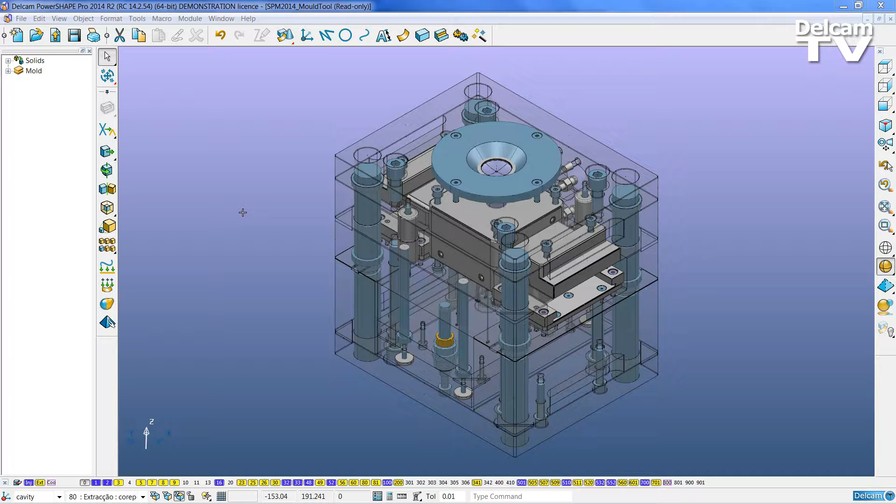Here we can see a complete mold tool assembly. By switching off the injection side, we can see two sliders, an insert and the lower half of the tool. So we can have a look at one of these inserts.

Just change the work plane here. We're looking top view. We're going to create 3 electrodes. The first electrode is going to be for the 2 tags shown here.

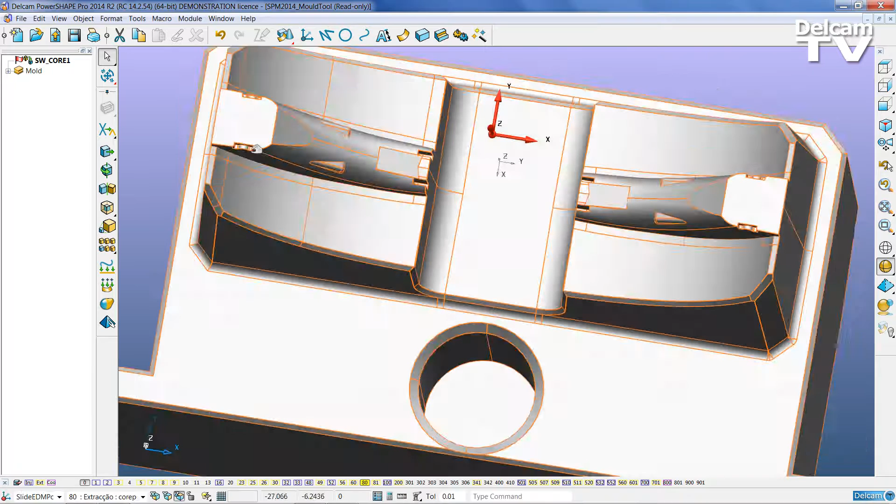So into my top view, just going to select that solid. We'll now have active this toolbar. Now, just going to do a lasso selection all the way around these top 2 regions here. Come into my solid core capture,

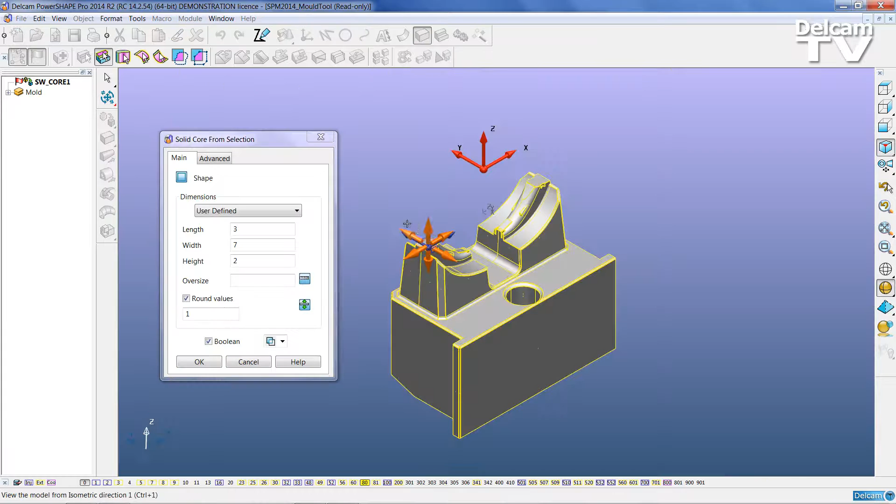and then apply the necessary oversizes to get the selection covering the whole area. Apply an oversize of 1 mm, and then change the direction here just to increase that to an overall height of 8 mm. Once that solid core is captured, I then need to apply some clearances.

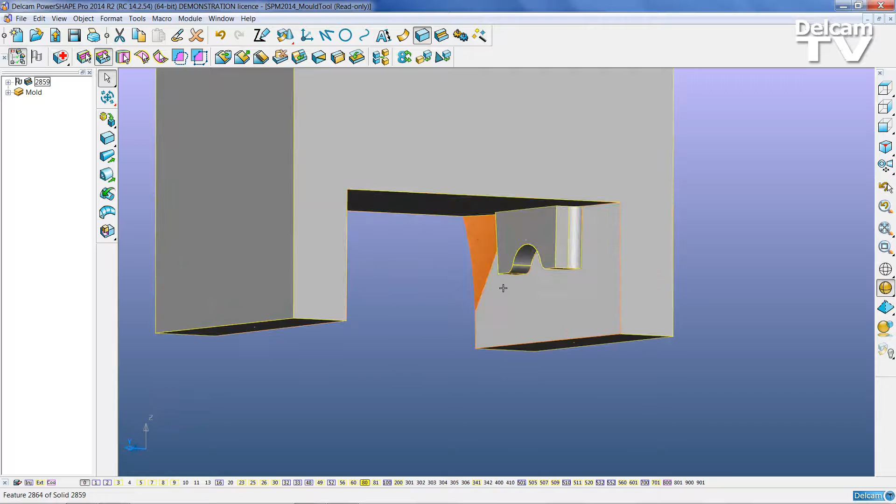So on the 2 inside faces, I'm going to select these first 2 here, and the opposite side, holding down my shift key, so I have all 4 selected. I'll come into my general edit tools and do an offset here of -1 mm.

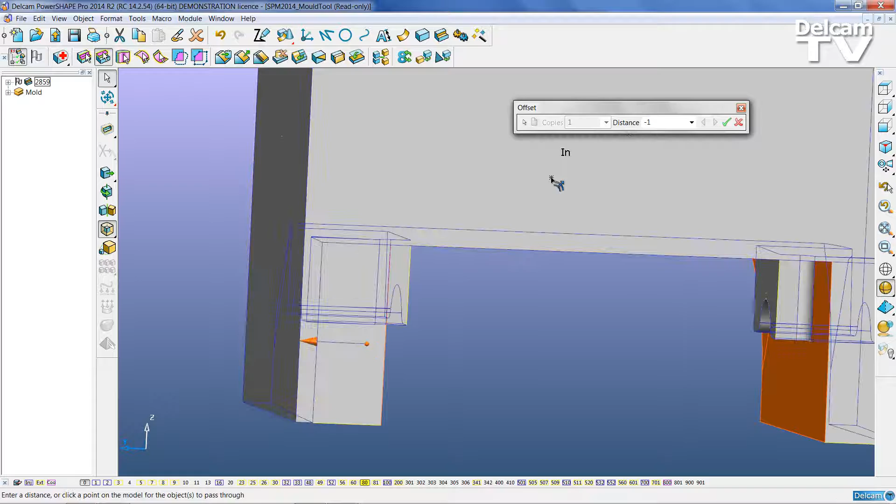I'll get the blue outline, give me an indication of where I'm to go. That is correct. I will accept that. We can see we have this radius here, area here naturally extended.

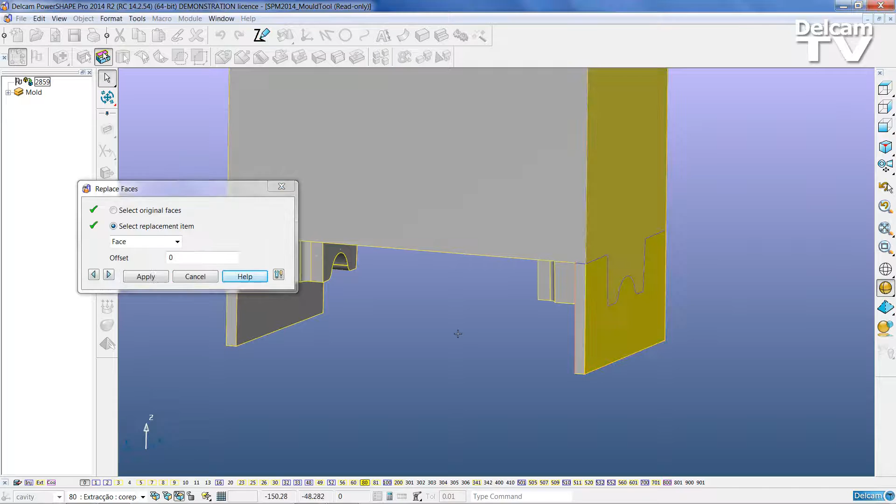What I would like to do now is just select these faces and remove them entirely. So I'm going to select the first 2 internal faces, do replace face to the outside, then using the right mouse button apply, have that removed.

Again on the opposite side, I can select the first 2 internal faces, select the external face, then using the right mouse button apply, also have those removed.

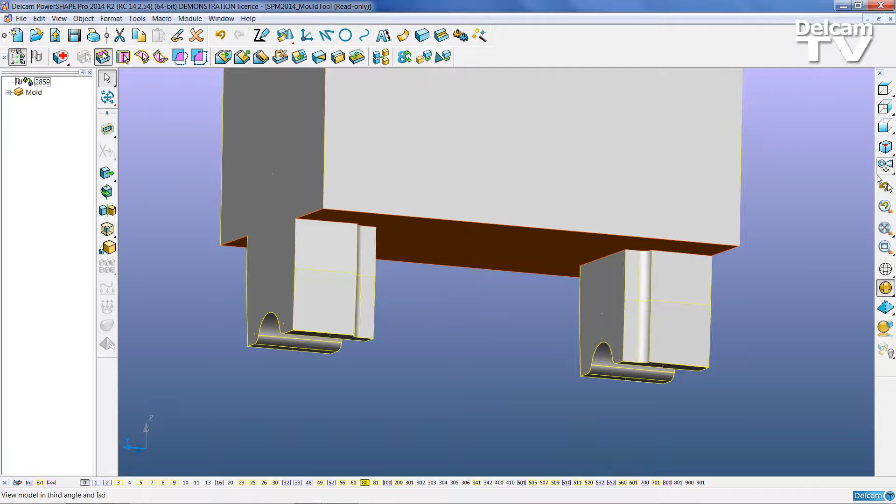All I need to do now is just apply some clearance to the top here. So I'm going to select that single face, then move that in Z 1 mm. I have now applied all the clearances necessary for this solid core capture, ready to turn it into an electrode.

So now make the insert active, ensure that's active, select the solid core capture, come into my electrode wizard. Does it include a base? No. This way the wizard will put it on for me.

Automatically selects the blank size that is appropriate to that solid core capture. I can rotate it round and see it here. Even at this early stage, I can do a simulation of the electrode.

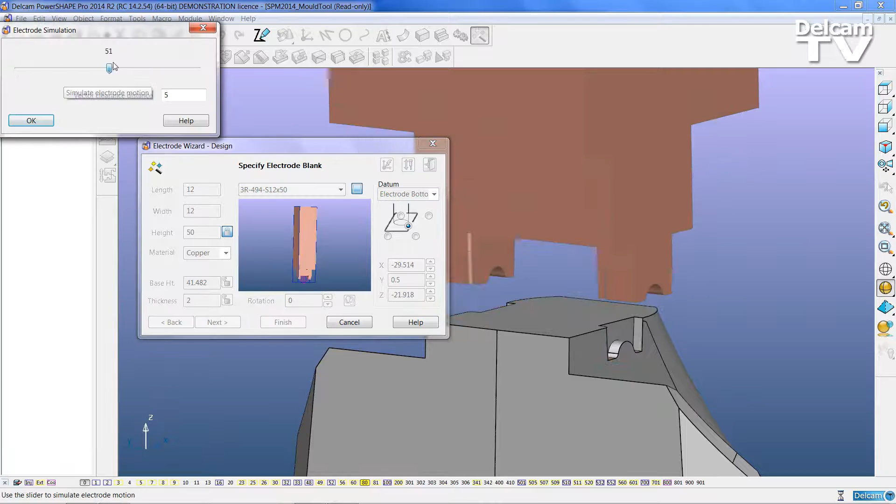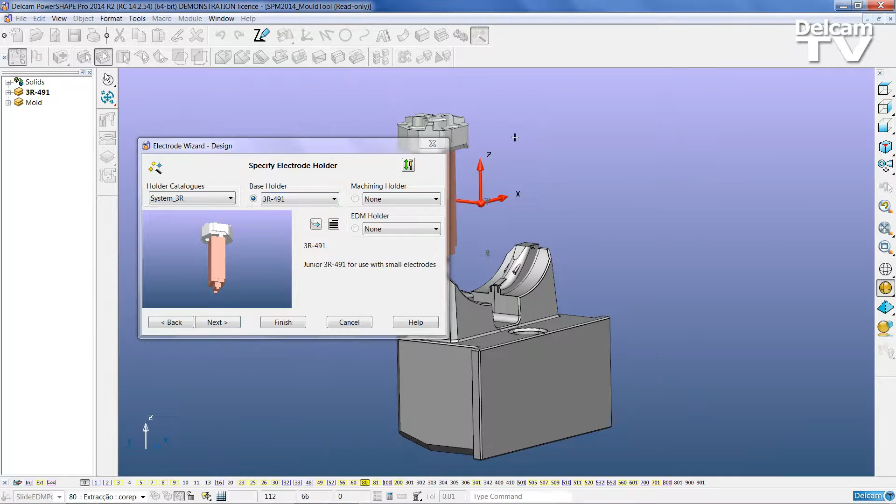Move to my next screen. We have 3 holder catalogues at standard: Erowa, Hirschmann and System 3R. This instance I'm going to use System 3R. Holder has been applied for me. If I zoom out now, we can see that holder been applied.

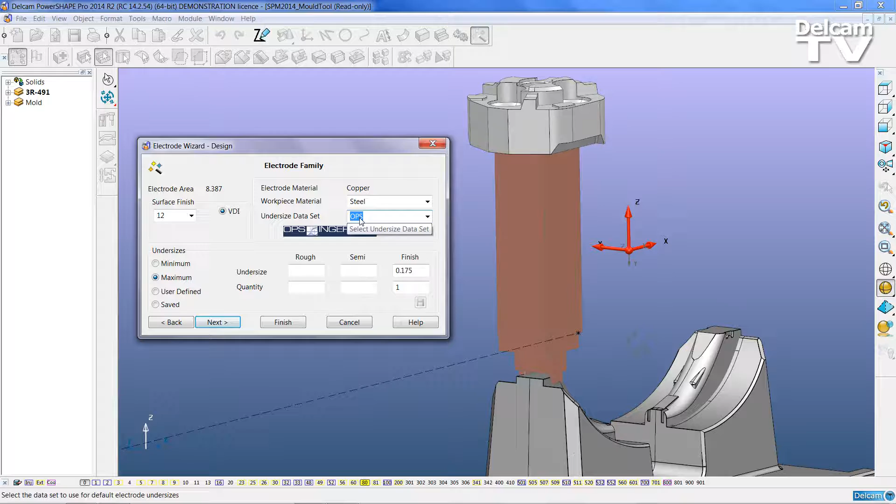I can go to my next screen. I can apply here spark gaps automatically using the undersized data sets of AGIE, OPS or Zimmer Kreim. This instance I'm going to use OPS. Go through to my final screen. I'll do no export and I'll finish creating my first electrode.

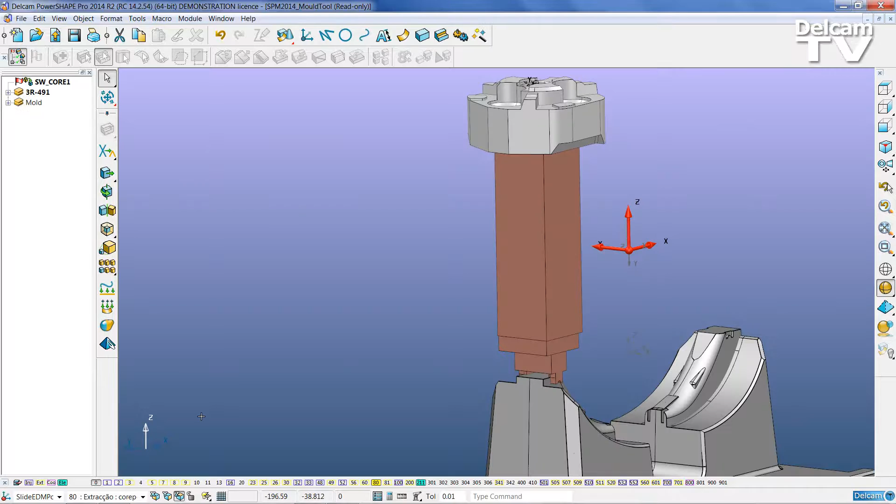So I'm going to turn off the electrode group, come back into the top view here. My second electrode is going to cover the whole main area. Now when we're doing a solid core capture, that works by using the extent of the faces selected.

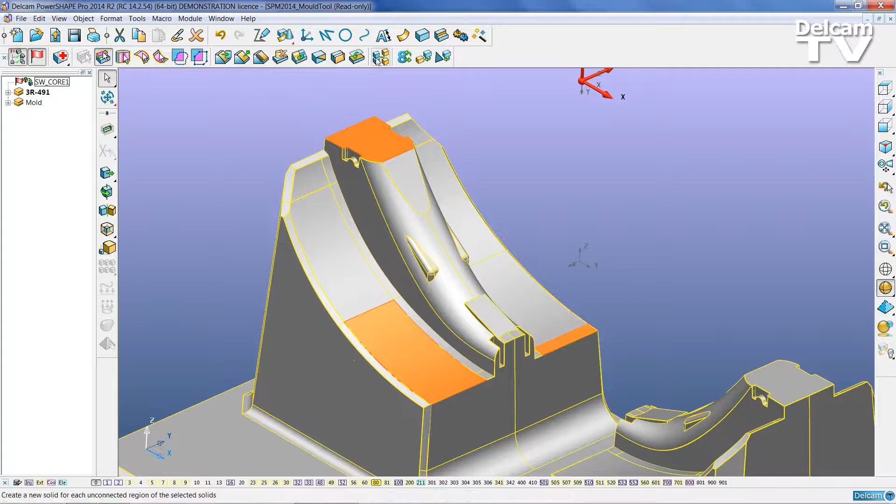So here I'm going to choose these 3 extents in the X, Y and Z. Then when I come to do my solid core capture, the block will cover the area of those 3 faces. I can apply an oversize here of 1 mm, then just apply some height on here manually, make it 25 mm. Now I've captured all the way around here.

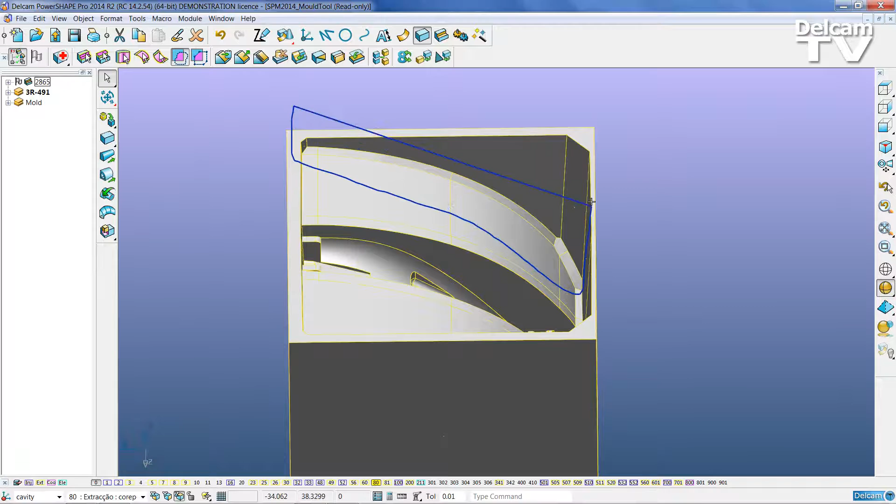Now I need to remove these excess faces. So I'm going to come across, just draw around here with that lasso selection. Just select those faces here, and I can use the shift key with the left mouse button to select any others that I wish to add.

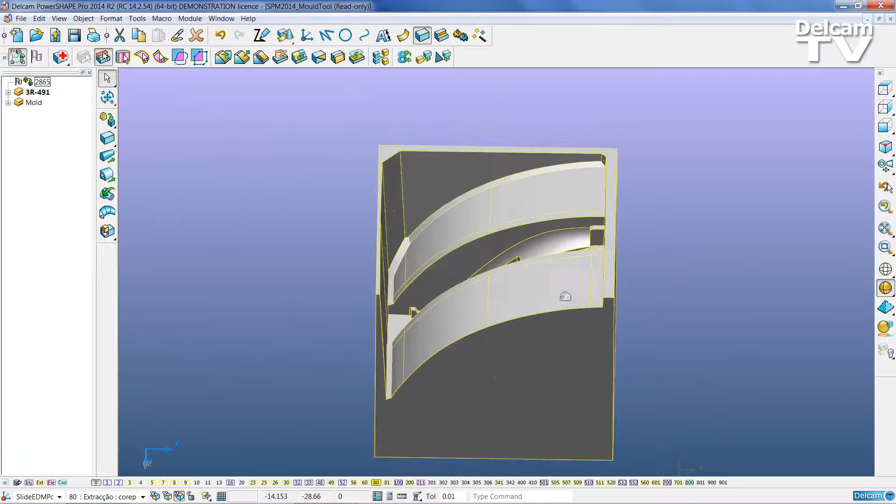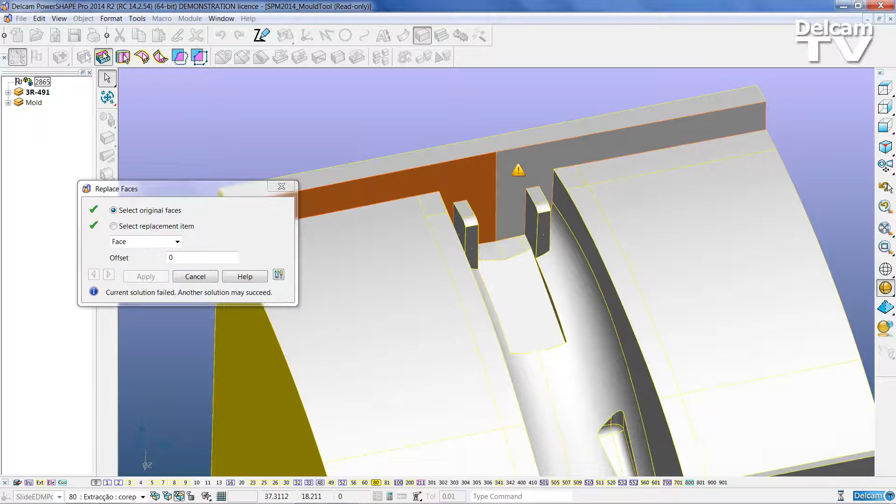Again, just lasso selection around. Selected all those faces, use the replace face, and then apply. I could use that face up, select the two faces, and choose the replacement face. Then the right mouse button, I can do apply, and again on the opposite side.

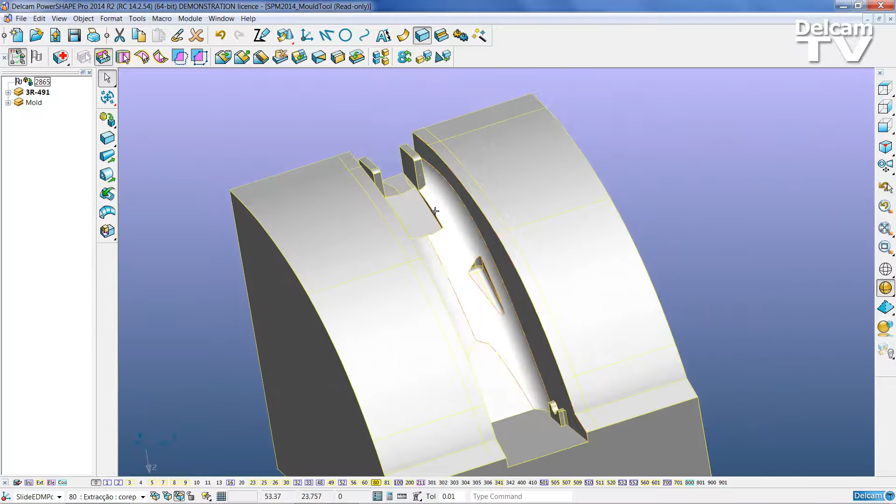Select the first face, select the second, select the replacement face, and right mouse button apply. I'm now going to remove these tags. We can see at the top up here, they're not required. Have these in a separate electrode.

Select the outside face here and replace that to the inside. Again, use that right mouse button to apply. Select the outside face, select the inside face, right mouse button, apply.

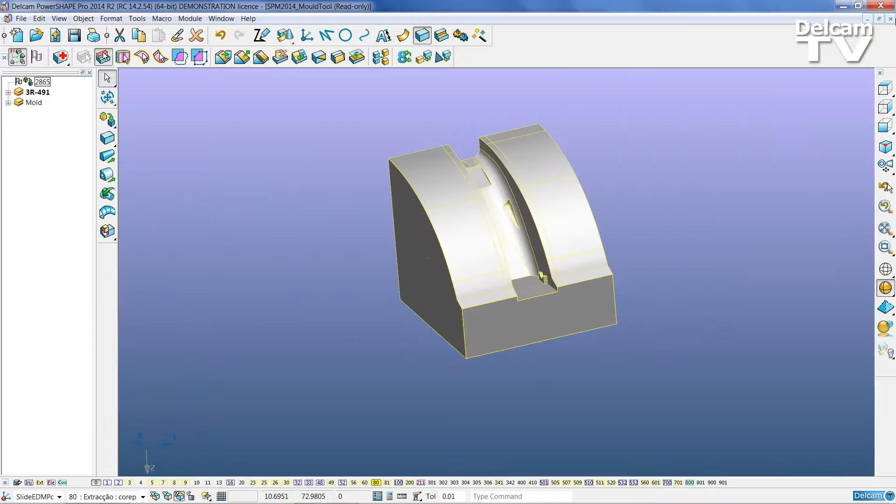Now it's coming to my bottom view. I'll remove these two tags from here. So again, just draw around here. This time I'm going to use the remove and heal.

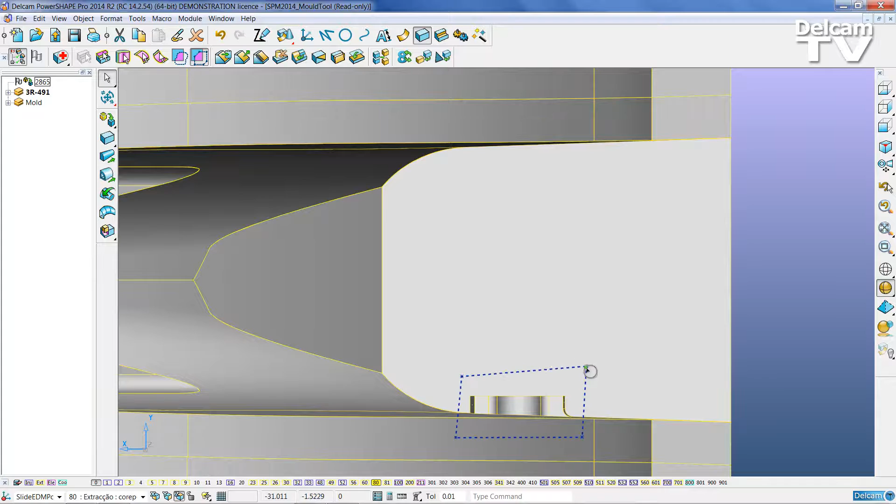I could have used a discrete lasso here just to come round and do a straight selection all the way around and use the remove and heal. Now in this face in here, I would like to do that on a separate operation. So I'm just going to select the single face, remove and heal. All the adjacent faces then are extended and re-intersected.

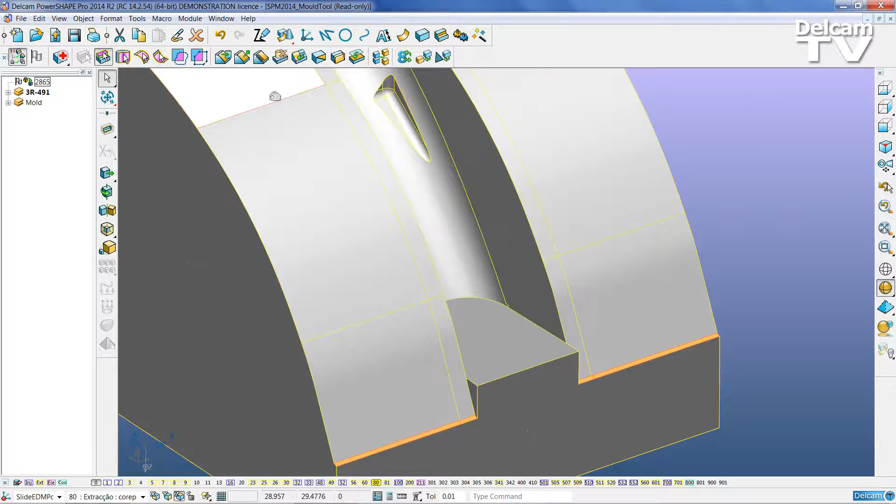These shut-off faces here, I want to apply some clearance. I'm going to select those four individual faces. Then under the general edits tools, I want to apply an offset here of -2.5 millimeters. With these faces still selected, I'll use the remove and heal just to finally take them away.

Now I'm going to have a look at the top up here. There is a pocket here with these faces captured. I'm just going to select here these 5 faces. I want to apply a move in here.

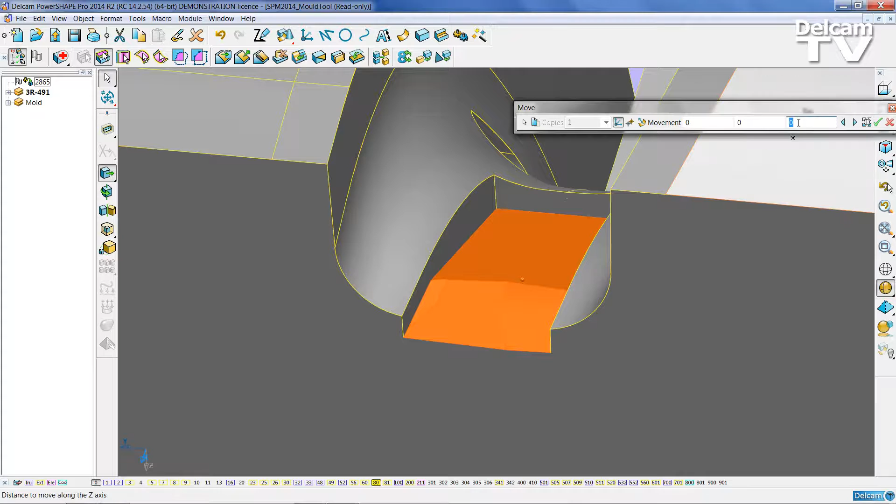I'm just going to put a little bit of clearance on first of all, just 0.5 millimeter, just so we can see then the extent of that coming down. Well, if I'd like to extend that further, I could apply then just a further move. We can see it moved all the way down. But notice we have some fragmentation here. If I go to my next solution, we can then remove all that fragmentation to have nice, smooth, continual faces.

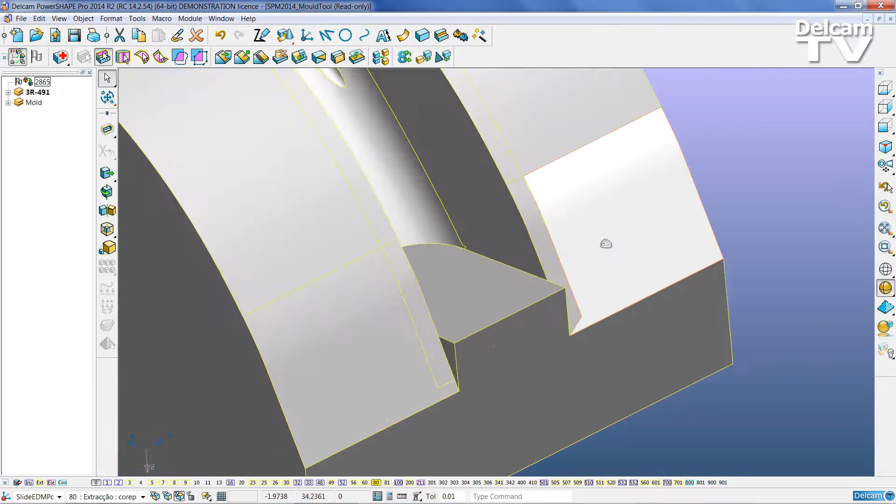What I can see on here, before I do any further operation, I can see where these two faces are. There's quite a nasty kink inside this face. And if I have a look on the far side, it's also around here. So we're going to use some new functionality here, and that's the ability to merge faces.

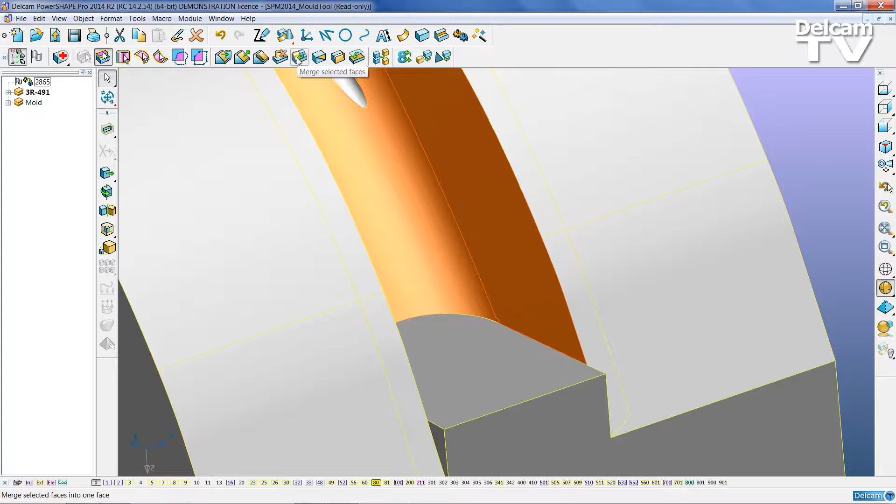So I'm going to select these two adjacent faces, come here into merge selected faces. When these are joined together, we can see then that's removed. Do the same on the opposite side. Merge these together.

I'm now going to apply a clearance in this horizontal face. So I'm just going to select it, come into my general edit tools, come into move. I'm just going to apply here a clearance of 0.75 millimeters.

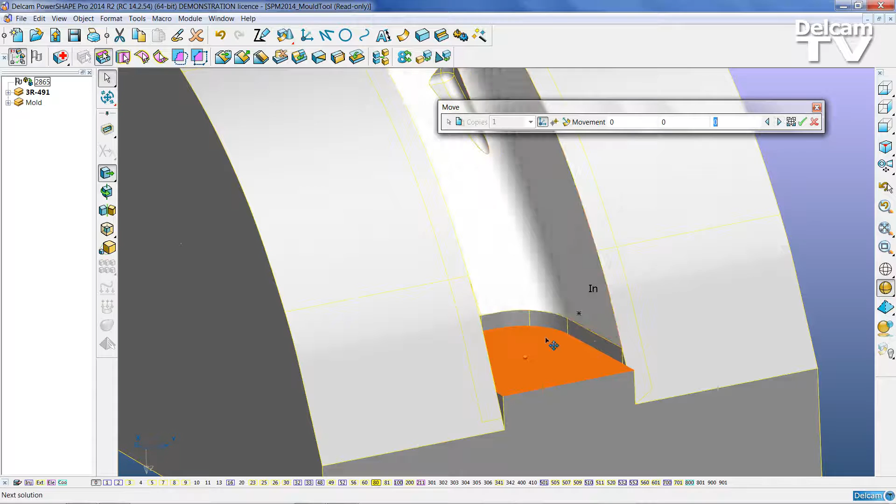Now use my next solution here. We'll see then in this area then we can naturally extend the internal surfaces just to flow. Now having done that, what I'm going to do now is just remove this area from the side here, just

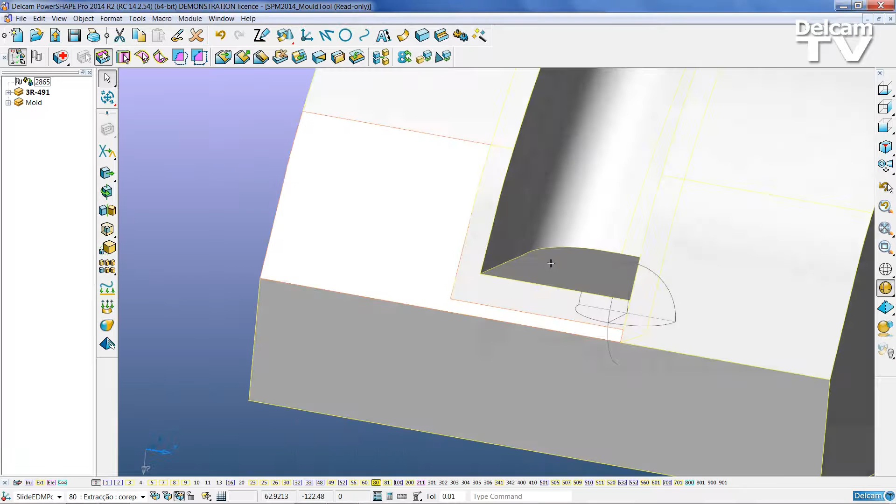make it nice and smooth, much easier to machine. So select the first face, just replace it to the face on the far side. We have that blue outline giving the indication. It's absolutely fine, we have now done that.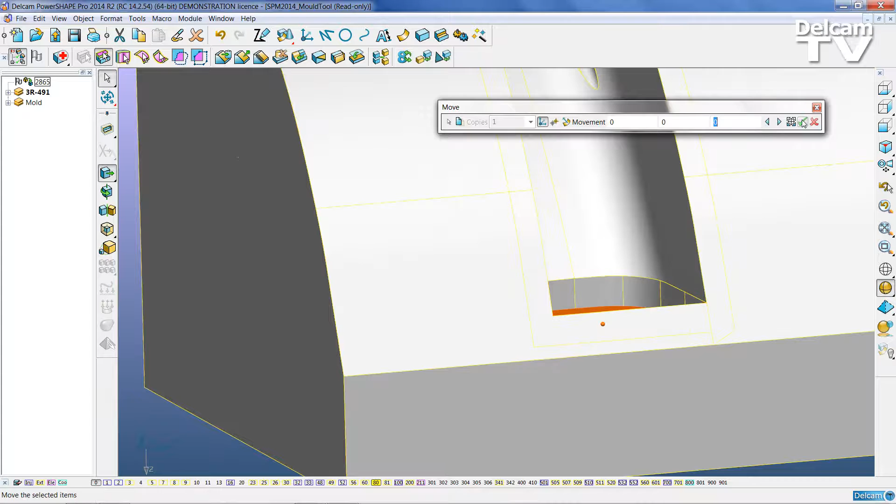Come to my next solution, and I've automatically done that. This is highlighting the ease to the user of using the next solution on the general edits toolbar here to give next solutions when there are multiple solutions to offsetting faces.

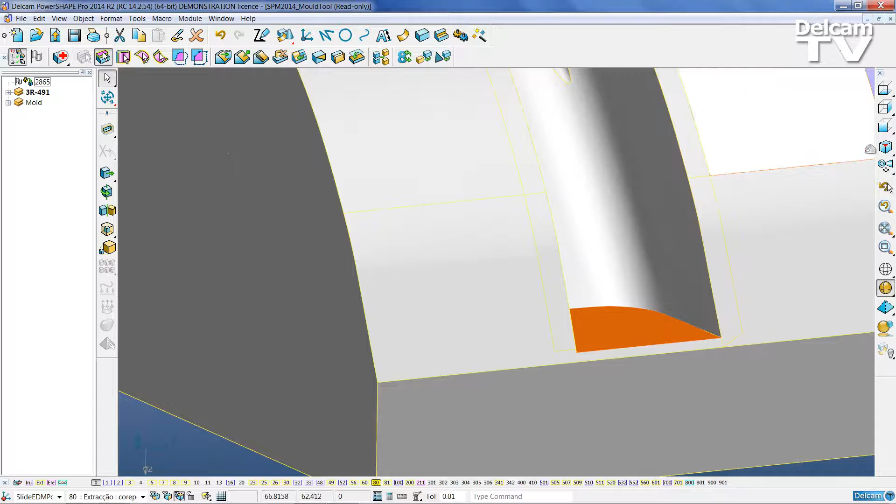I can turn this solid core capture now into an electrode, ensuring that I've got the insert active. Select now that solid core capture, come into the wizard. This instance I'm going to say yes, it does include a base, so therefore the wizard will not put one on for me.

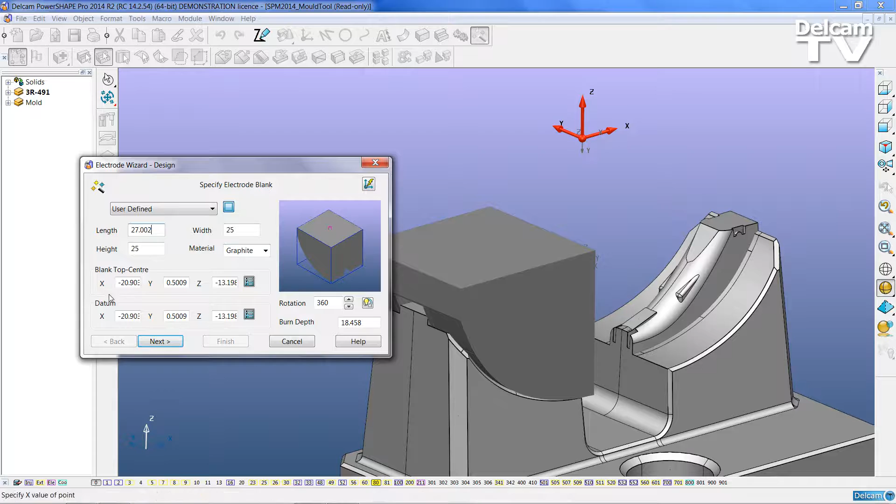I'm going to use a user defined here, electrode blank size, showing that we can create here the length, width and the height, material, full control over the centre of the blank top and the datum. I can rotate it round here in the wizard.

I'm just going to use the same holder that I used in the first electrode. Now you can see the level has increased here by 1, and so is the counter by 1. Here we have the electrode group and the name. It's all done automatically. We're going to use this undersized information the same and just finish off this electrode.

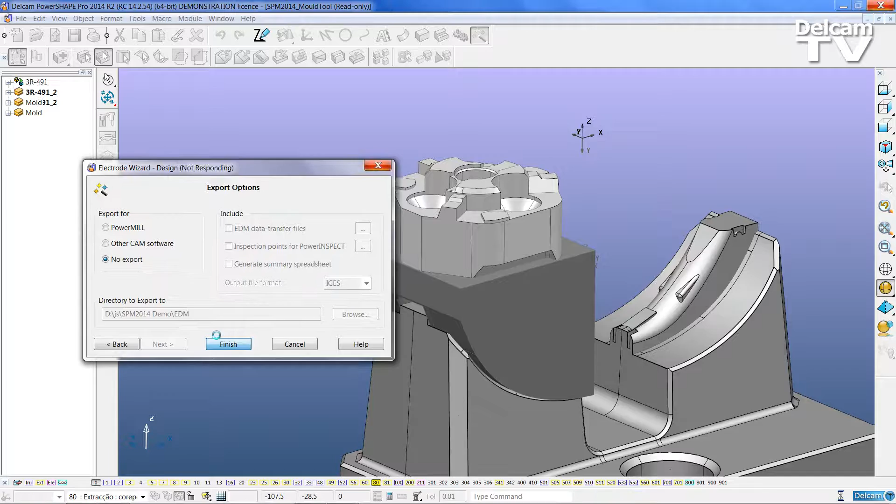Again, this is a setting sheet. We look at the general assembly drawing now. That's been updated for the second electrode. To see the position of the first, I can just turn it on here at the level.

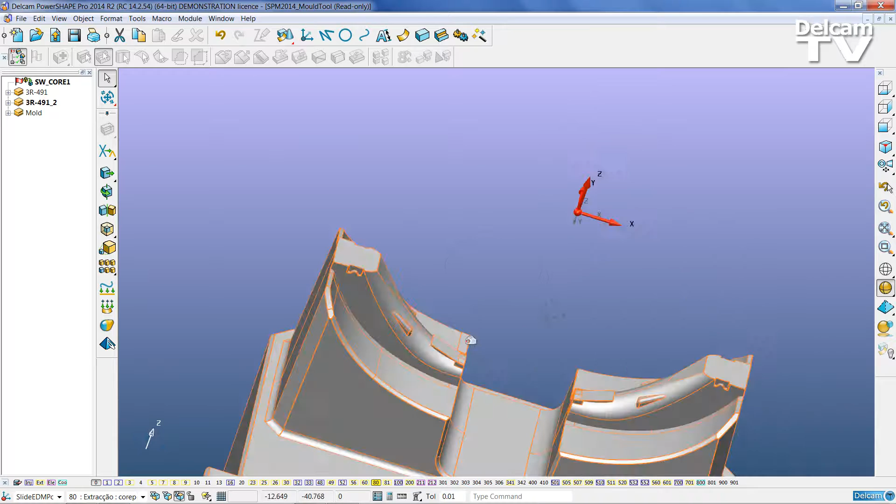Come back now to my session and I'm going to create my third and final electrode. So here I'm going to create an electrode that just goes inside these two slots. So just as you saw me do on the second electrode, I'm going to select two faces which just cover the extents. Come into my solid toolbar here, take a solid core capture around there, and apply an oversize of 0.5 millimeters.

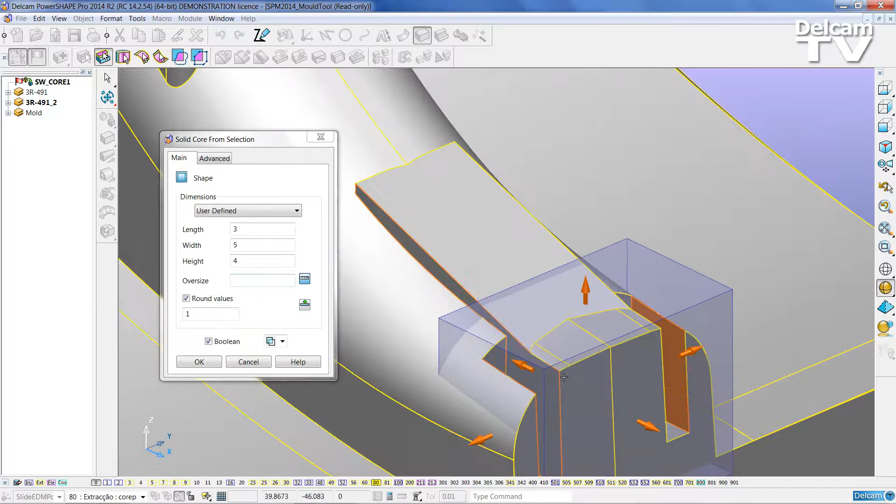Then again, just increase the height here so I've got enough clearance away from the rest of the insert. So here I'm going to raise it to 9 millimeters. That's been done. Now I just need to apply some clearance. So first of all, I'm going to select these two inside faces and do a replace face to the outside.

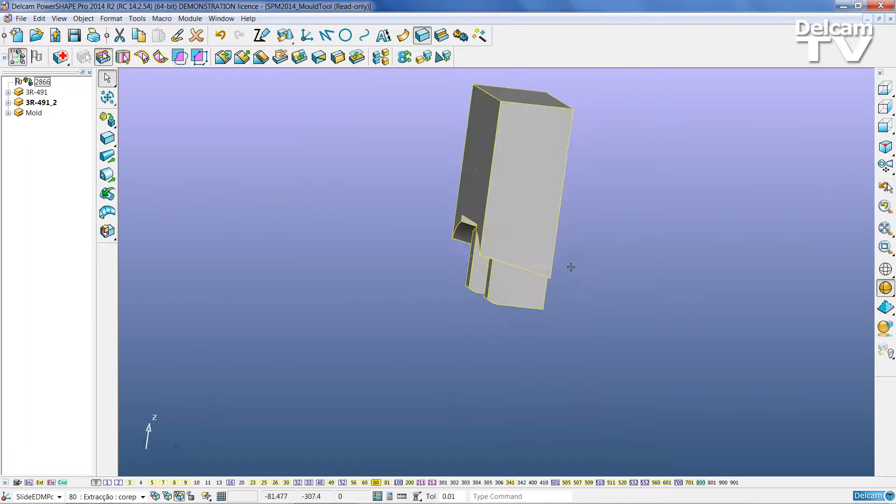And now I need to move these top faces up. I have quite a lot of different form here. So what I'm going to do is a measurement first using standard PowerSHAPE functionality, just a two-point measure. Here I can see a distance of just under 6.25 millimeters.

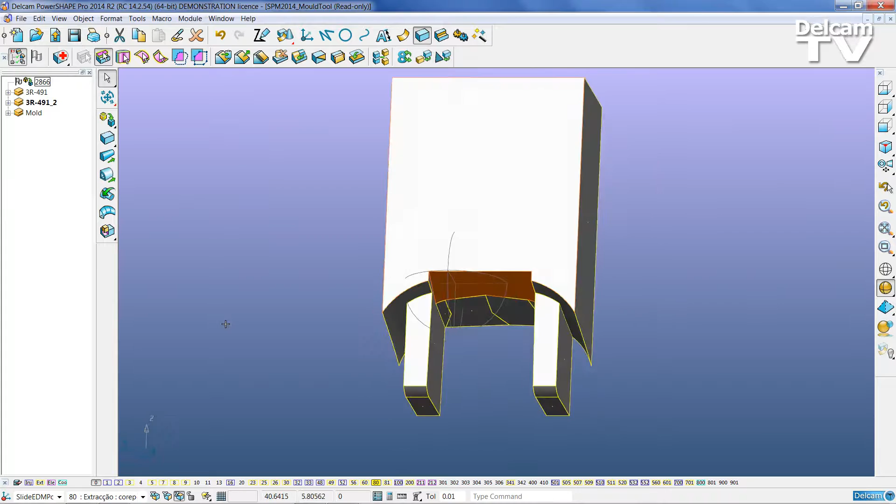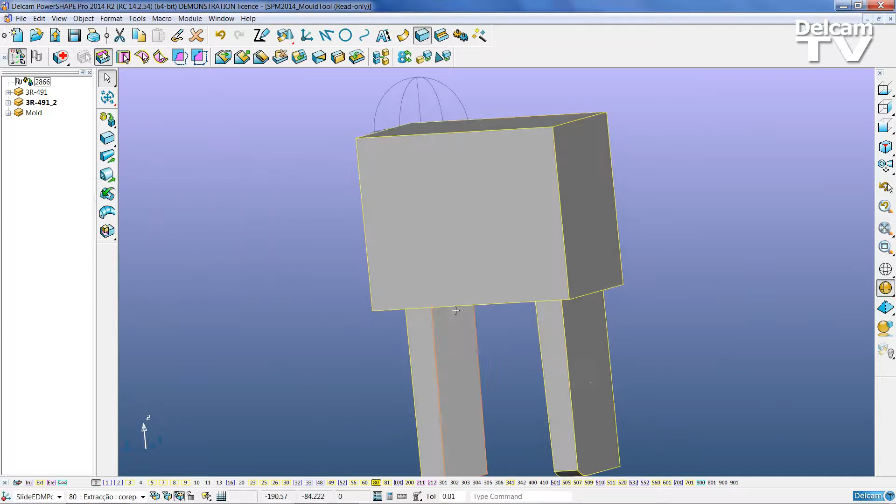So now I'm going to select these individual faces, holding down my shift key when I select each additional face from the first. Then when I do a replace face, I'll enter a distance of -4 millimeters, from the top. I have a blue outline. When I click apply, all those faces have been removed to a nice flat face, making it much easier for machining.

Turn the insert on. All that's left for me to do now is turn this solid core capture into an electrode. So here, I just need to come into my electrode wizard.

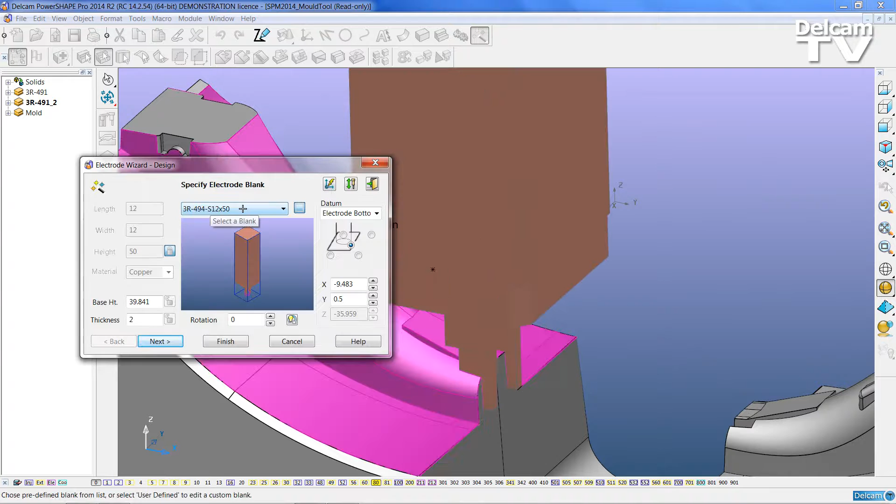This instance has included base, no. A blank size has been applied for me, which is correct. Now just apply that holder. The count has been increased for me, but now I want to show some new functionality.

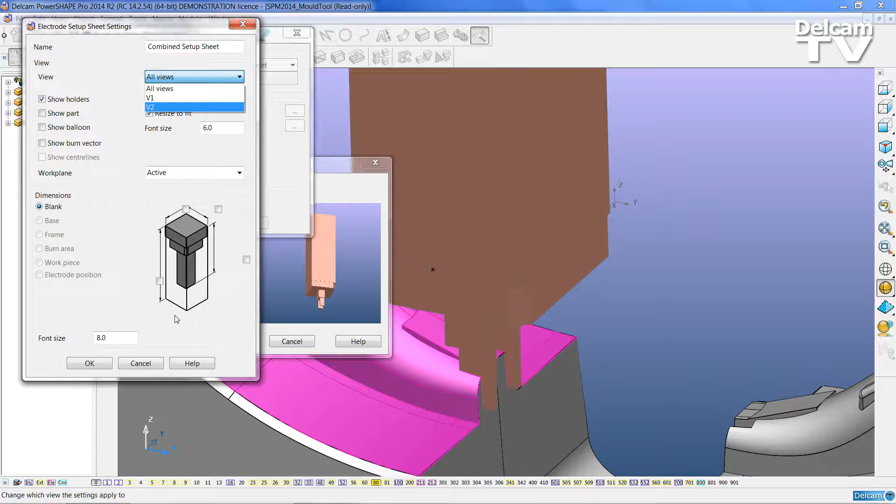So here, in the combined setup sheet, under all views, we have new functionality available for automatic dimensioning. Now this is dependent on the view you've got on your setup sheet. So an isometric view gives a different result to a plan view, different functionality becomes available.

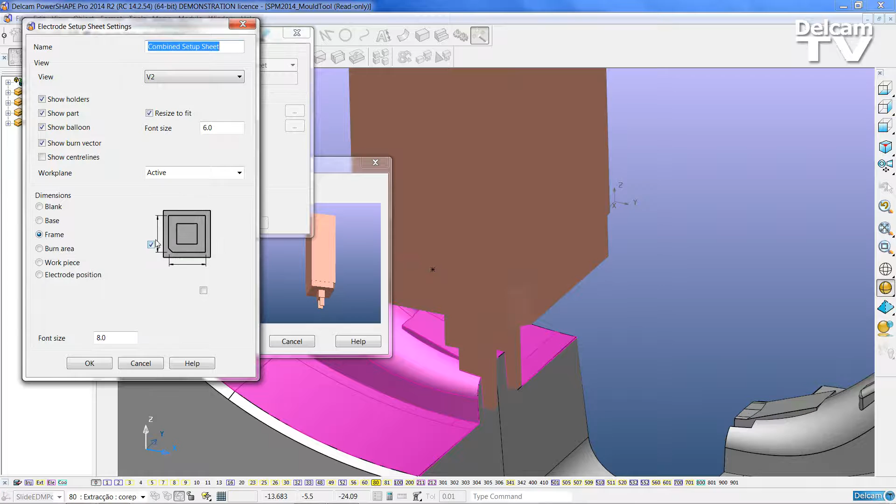So here we can automatically dimension the blank size, the base, the frame that was automatically created for us here, the burn area, the workpiece, and the electrode position relative to the tool with which it was taken. This instance we're going to do the frame, enabling the Y dimension and the X dimension to be labelled. Here it's a one-off modification, it's going to do just for this one electrode.

And now here, under the spark gaps, it's calculated one for me, but based on my previous experience and knowledge, I can change that manually very easily, and I could save that for future reference. So next time I have an electrode of this surface finish, with this area, on this electrode material, with this workpiece material, it would then remember the result and automatically populate the form for me.

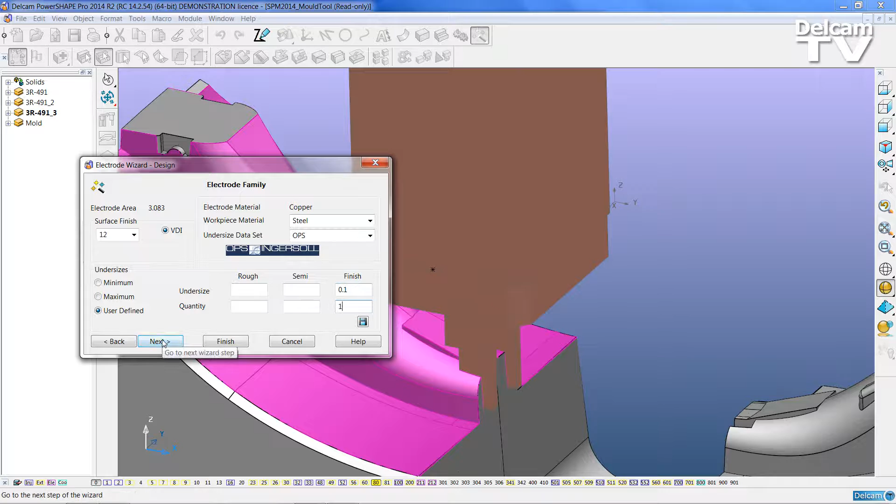Now I'm going to export this, so I'm going to select here for my EDM data transfer files. Here we have the major OEMs supported for us as standard. This is the standard that comes with the Electrode Design Wizard. I'm going to export in the Mitsubishi NC format.

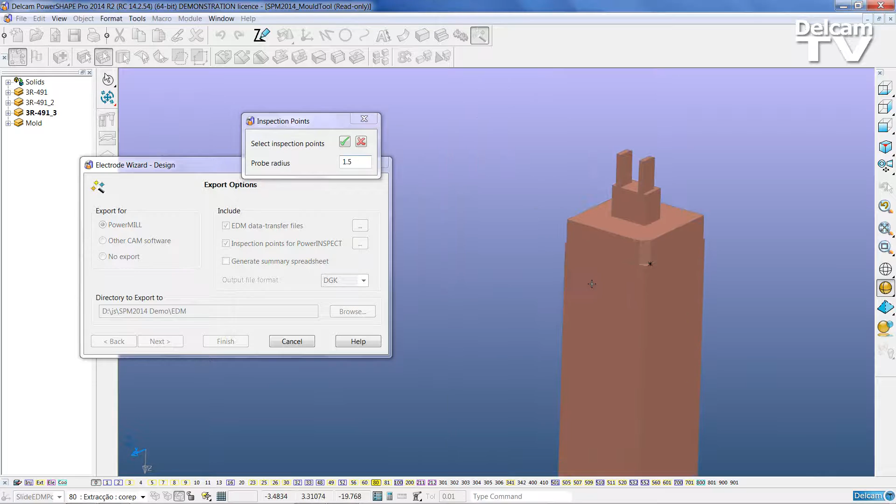What I'm also going to do is create the inspection points for PowerINSPECT. Now this functionality is with the Electrode Design Wizard license. It's quite a small electrode, and we'll change the probe radius here to 1.5 millimeters.

Now, using the intelligent cursor, which is a very popular feature in PowerSHAPE, I can use the wizard to create inspection points, first of all around the frame, and then on the impression itself.

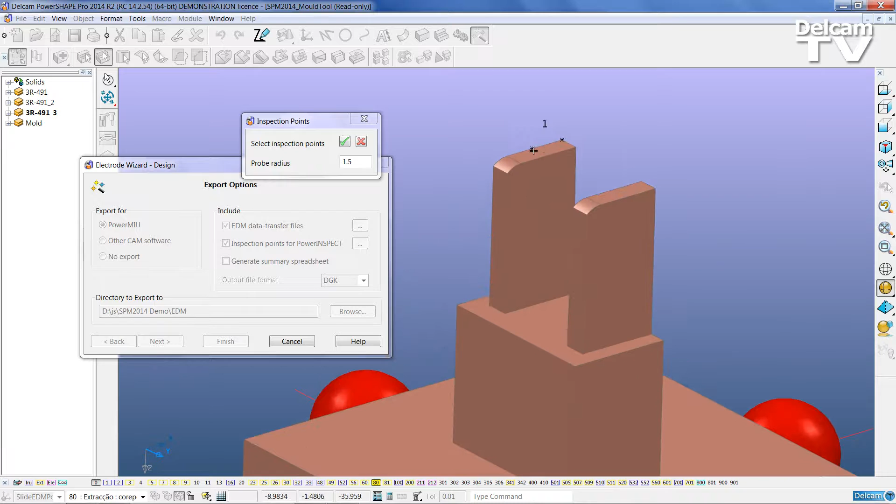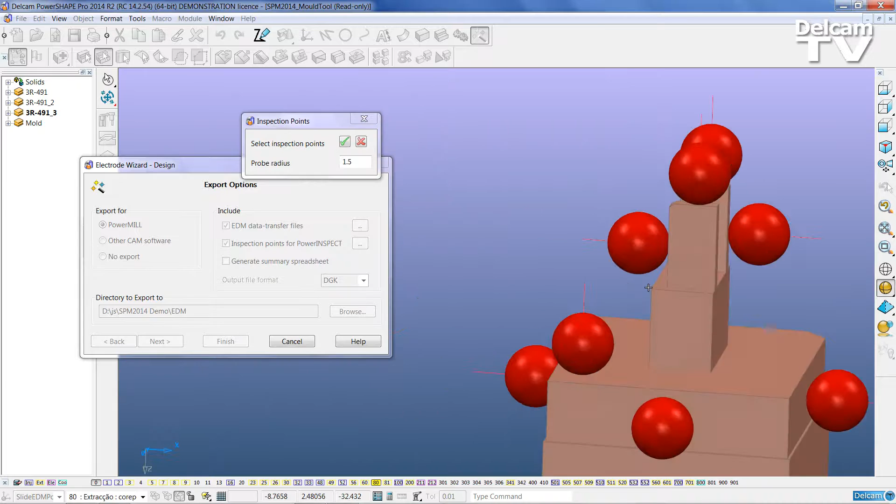So here, at the top of the face centre, I know I'm exactly on the centre. I'll do one for my overall depth. On the far side here, I can just do one on that rear face. If I create a point and I would like it moved, I can just click it and then reapply. Click accept, and that's done.

And now I can browse to my location, with my directory set now of where I'd like this exported to. I can select finish, and the Trode file will be created for me.

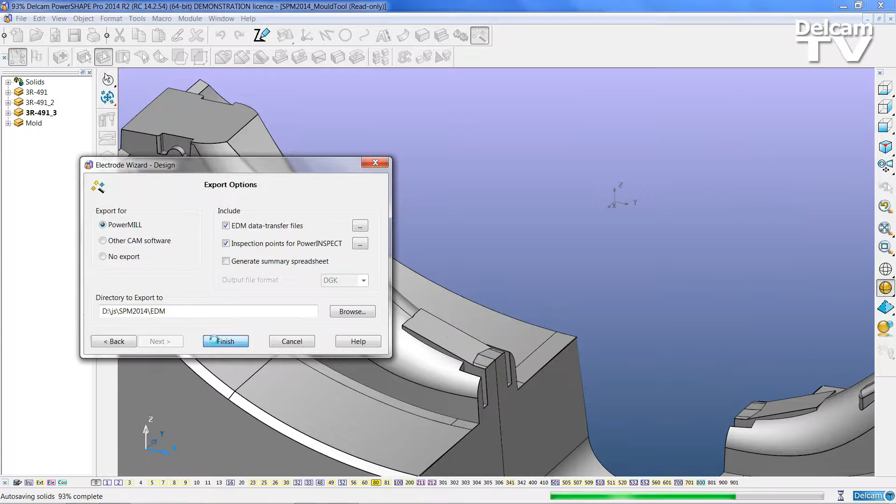The 3 electrodes will be written to the Trode file together with the drawings, the setting information, and will automatically have the script file created for us.

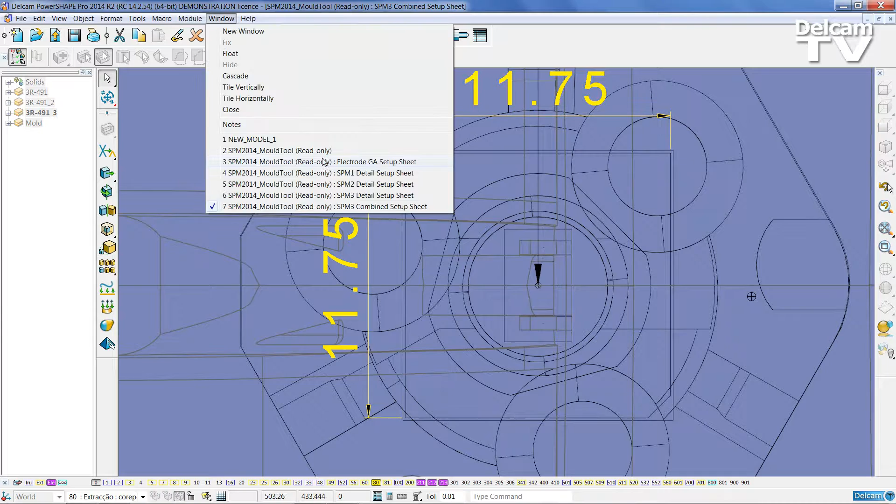Don't wish to create another electrode, but here I'm just going to select everything on this level, zoom in. We can see then that the frame size has been automatically created for us. The general assembly sheet has been updated.

And when I come back to the mold tool here, turn the electrode groupings off, come to this final electrode, and use my right mouse button, turn my burn area shading on.

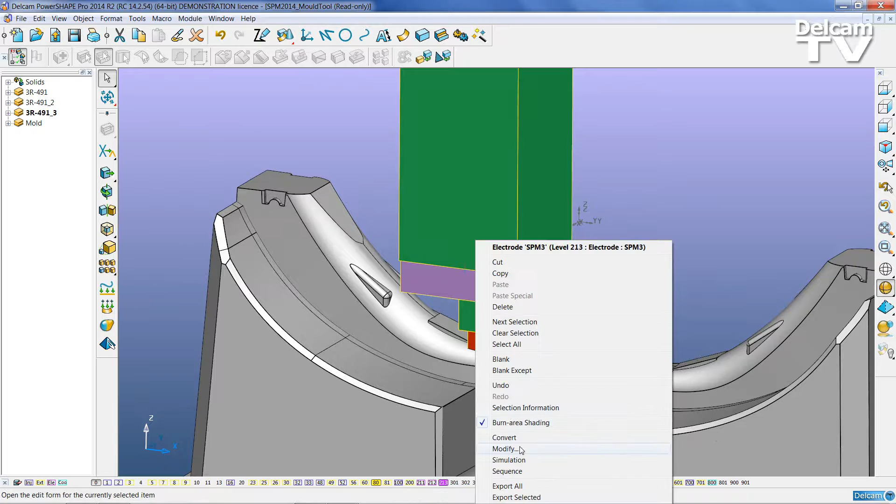So here, the green is the blank size, the purple is the frame size, red is burn area, and yellow is clearance. Identify all the parts of the electrode, and come into the simulation, and see now the electrode leave and re-enter the job as it is for usage on the machine.

Now, if we look at the results that have been created here, we can see the Trode file has been created and the NC file.

If I come into my notepad, what we'll see now is that for the first electrode we have the XYZ position, and at the end here we have the spark gap information, the undersize information. Second electrode, the XYZ, here we can see the rotations, and here is the third electrode, together with their differing spark gap, undersize information here at the end.

We will now go into PowerMILL and extract an electrode ready for machining. In PowerMILL, I can extract the electrode now from the Trode file.

I have the 3 electrodes shown here, all colour coded. This instance I'm going to select SPM3. We will have all the colour formats here displayed. There's a key on the left hand side which indicates the areas of the frame: the base, clearance, extension and the burn area. I can change the blank height here, the base height.

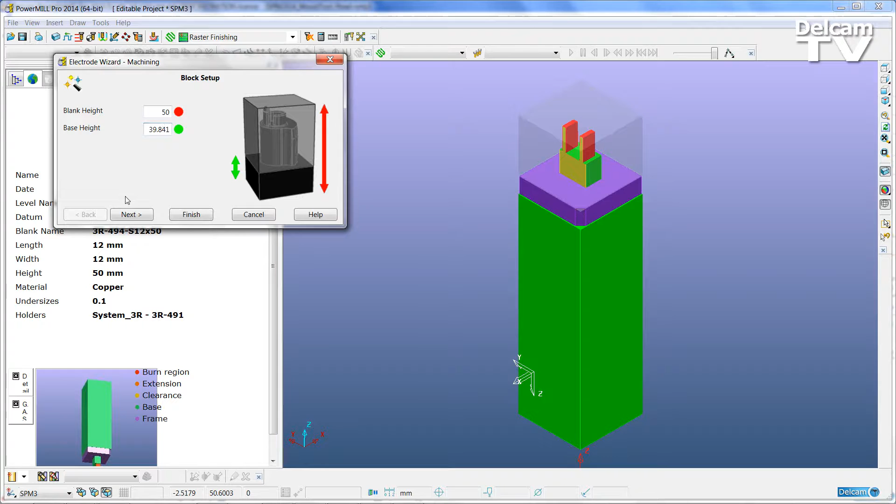Now that information was created in PowerSHAPE. It's been passed through into PowerMILL. I can interrogate for minimum radius or the draft angle interactively.

Now for previously defined templates, saved previously, they've been reloaded into my PowerMILL session. These are created by the user, and then the undersize information, the spark gap information is automatically applied for each individual template.

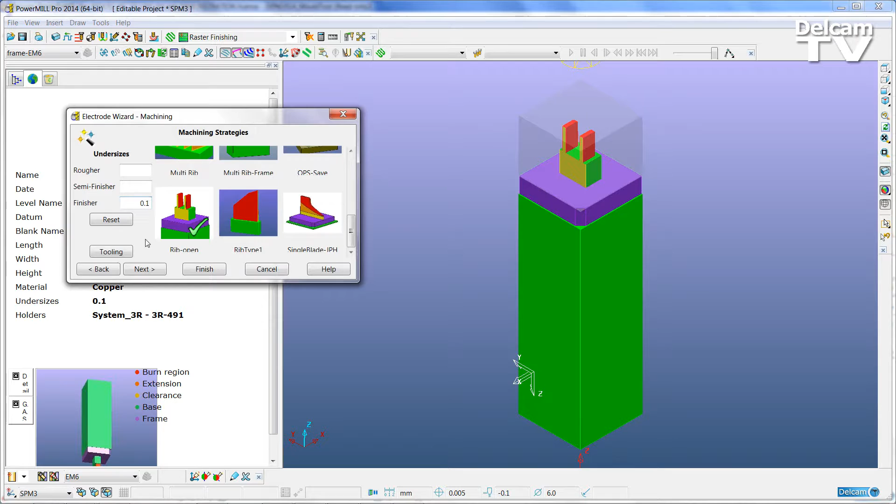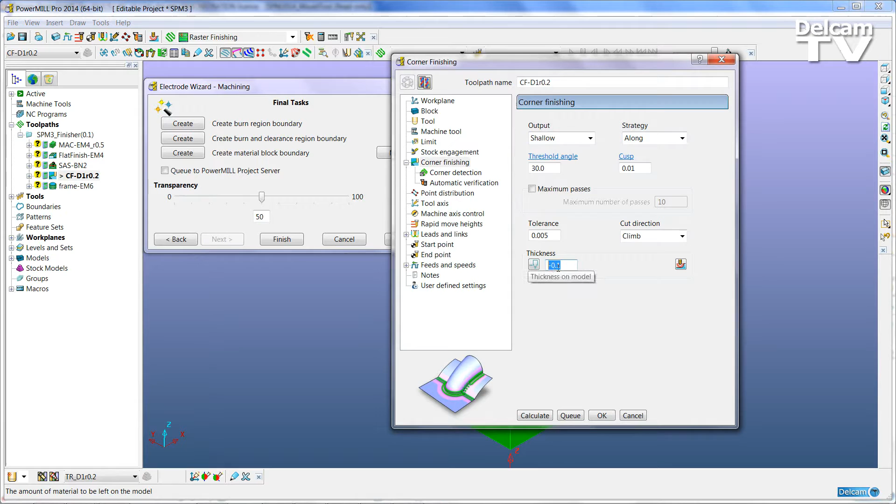If I go over now and have a look at the imported templates, we see the name of the electrode, SPM3. There's the finish electrode, here's the undersize. We have all the templates imported. So if I was to look at a finishing template here, we'll see that thickness there, 0.1 millimeters negative. That undersize has been automatically applied.

I can deactivate, hit finish. What will happen now is that the heights of the toolpaths are being set, then they're being automatically calculated in PowerMILL.

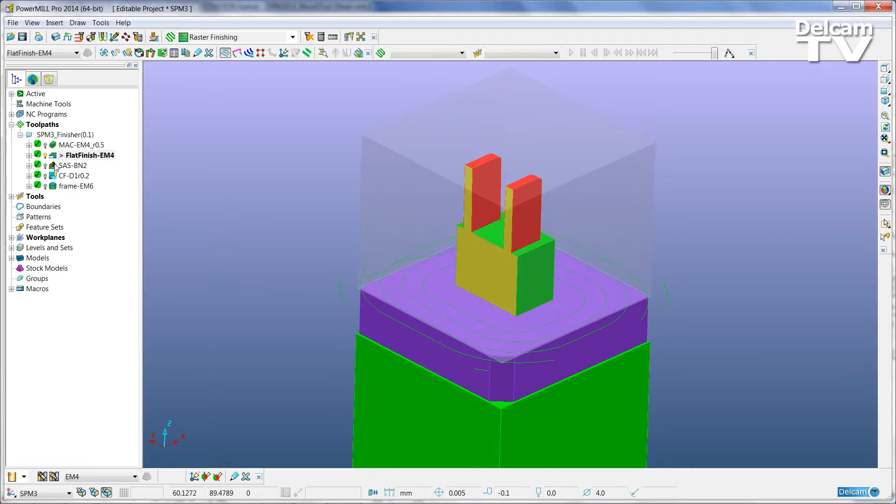What we'll see here now for each of these toolpaths is the model area clearance toolpath. We've now got a flat finish that will just finish the base. We have an automatic toolpath here, the steep and shallow, that goes all over the impression. We have the corner finishings, which those corners are machined out. Then we have a finishing toolpath for the frame.

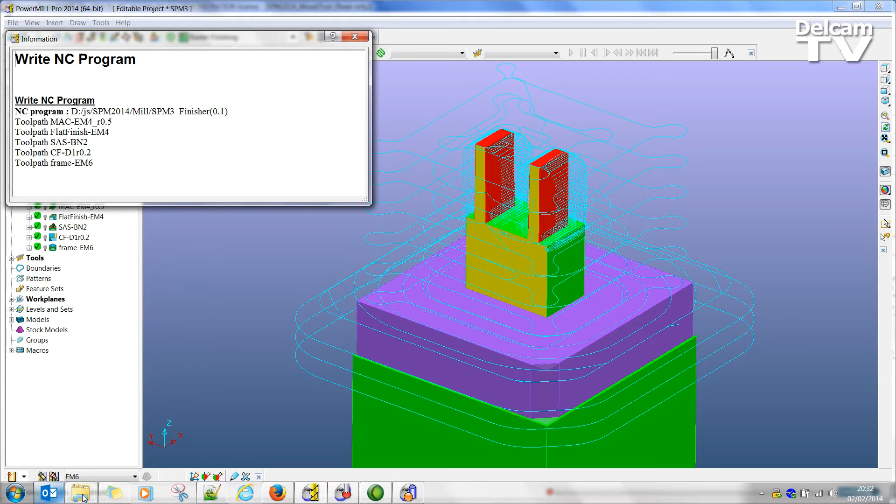If I go to the NC program, we have a folder now created. They've all been automatically applied. I can now do a write. That's going to create that NC program. That's all been written out. I can now look at the NC program, the NC code that's been produced. Edit with Notepad, and here now is all the G code and NC code data for that electrode.

Having done that, I can now go into PowerInspect and inspect the electrode. We can now extract the electrode from the trode file using the Electrode Inspection Wizard. This is in CNC or OMV format. Here it's CNC. We can select the trode file that's created earlier and extract the electrode from that. The physical CAD geometry is now being imported.

And move the probe away from the imported electrode. Select my finisher points.